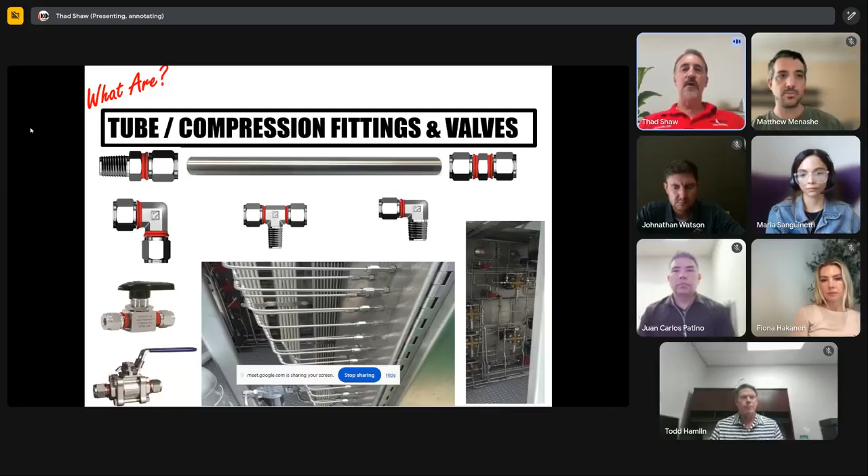One of the big problems with these fittings is they all have the same instructions on putting them in, and during installation, a lot of people do not know the instructions or do not follow the instructions, and that's where we came into play.

We knew there were several things that caused a high leak rate in the industry. Typically when I go do a presentation to an end user, the report is a 5 to 10% leak rate in the industry, and it's because of the installation process.

It's not the fitting itself. The fitting itself, if it's installed properly, is going to work 100% of the time. So we addressed that, wanted to solve that problem: how can we take that 5 to 10% and bring it to zero?

So Superlok came out with some innovation that we call almost dummy proof. It's a leak-free guaranteed process where when you put this fitting in, we're going to guarantee it for life that it will never leak. As you see here, the installation process - I've had a tube fitting in front of me.

You insert a piece of tubing into the fitting and you hand tighten the nut. And once you hand tighten the nut onto that piece of pipe, you mark the nut and the body with a marker, and it's just 1 1/4 turns from hand tight.

And that's the instruction for every brand out there. So they're all the same dimensionally, and intermixability with all brands for the most part is 100%.

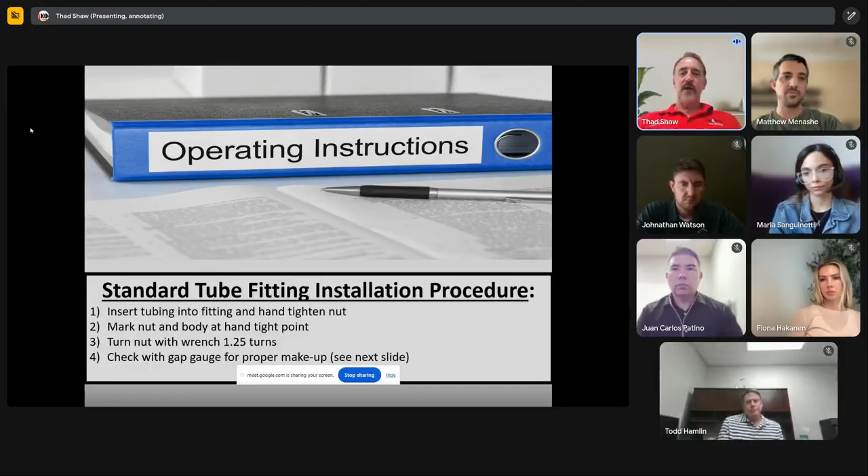It's a gap gauge that you check the gap between the nut and the body after you're done. This is the part of the process that is rarely seen. If I had to give a number on it, less than 5% of installers actually use a gap gauge, and many of them don't know that one exists.

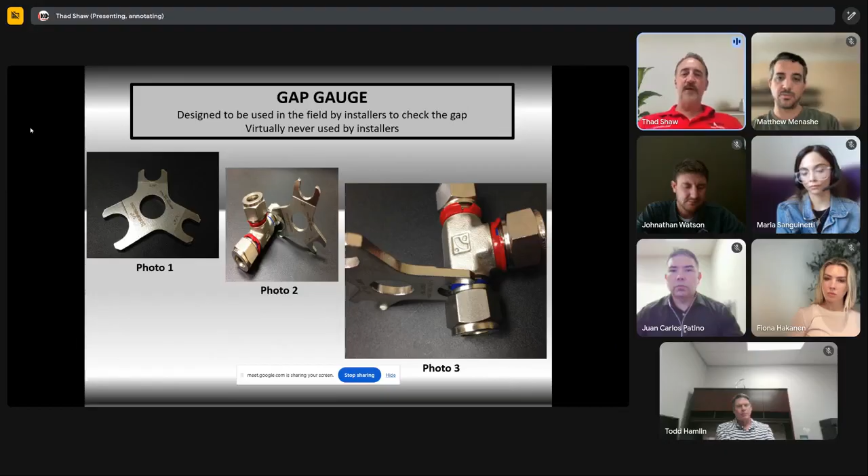So what can happen for you guys in the car wash industry when you do have fittings that leak? One, you've wasted the fitting and the tubing, which is an expense. Number two, a lot of times you'll have to cut that section out and go back and restart.

So we've got some time being spent. Time is money in your industry. And also probably much larger is equipment failure and leaks. In the car wash industry, being down an hour, 2 hours, 4 hours, that actually translates to dollars.

So we want to stop the downtime, and we want to make sure that when these products go in, there is no downtime. We hear a lot from other car wash operators who have used different types of plumbing and piping that while ours may be marginally more expensive, in the long run it costs them much less to use something solid that will never leak, versus having to send maintenance out or having their car wash be down.

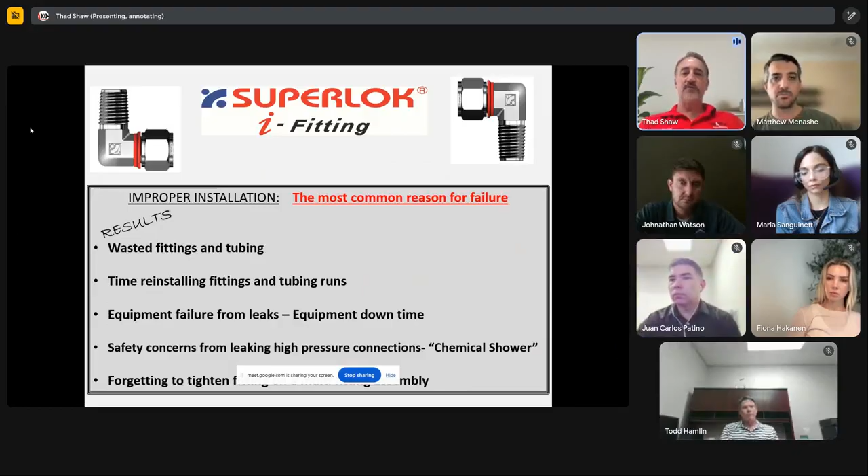So here's our solution, and we call this a game changer in the industry. The Superlok i-Fitting has 2 patents on it, and this is the primary patent. What I'm going to do is share a video with you about an installation, and you'll see exactly how the fitting works.

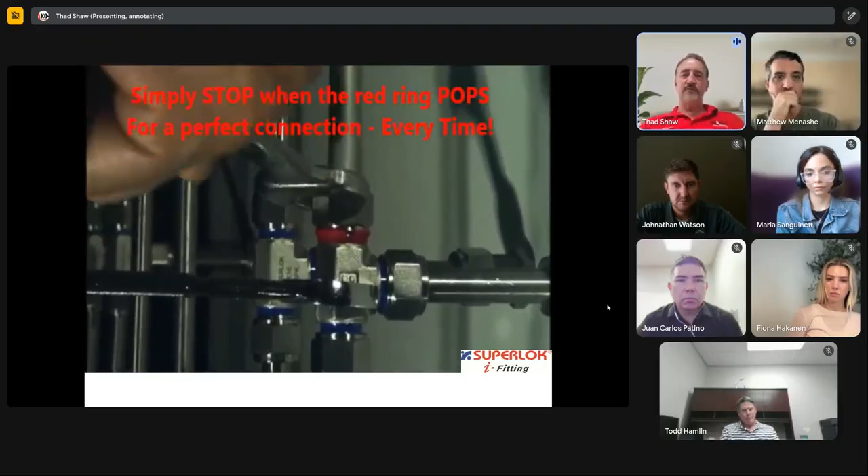See, he's hand tightening that nut onto the tubing. As he turns, that nut will be turned 1 1/4 times. This red ring is an indicator of when that nut has been turned the 1 1/4 times. That exact moment was when the indicator popped. It's a real easy way to quickly put a fitting together and know you've done it exactly correct every time. If that nut was a 1/2 turn back from there, it's too loose. A 1/2 turn or a 1/4 turn tighter than that, it's too tight. So literally that spot where the red ring pops is the exact point of perfect compression, and we guarantee that fitting will never leak.

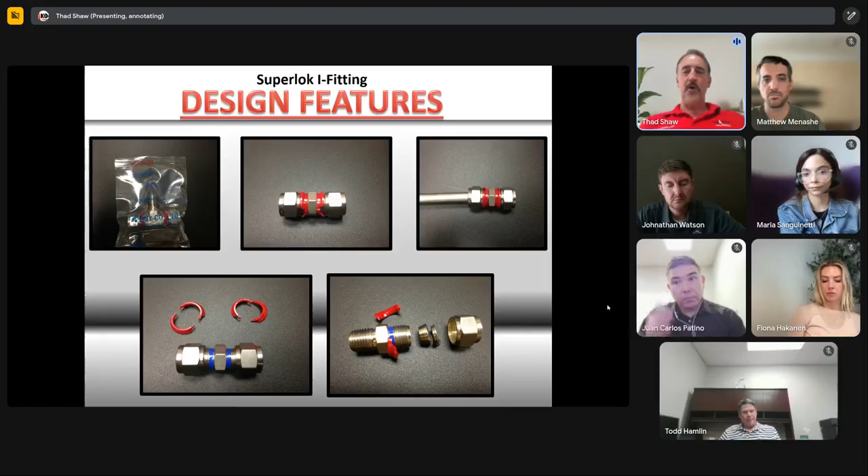So when ours has been tightened, you'll see the blue band appear when it's been tightened correctly. If you want to do a safety check, you can go to that wall and look at the entire assembly. If you still see red rings, you can immediately identify that it has not been tightened yet, which could be a safety issue, so make sure it gets tightened before you leave that facility and there are no leaks. If you see blue bands throughout your assembly, that's a secondary visual confirmation that everything has been tightened, leak-free, and you're ready to go. So those are the two patents that have been the solution in the market to most of the problems that tube fittings have had.

Okay, we're going to move right along. This is some of our return policy. Like I mentioned, we have a lifetime warranty on those products. Our certifications, we have virtually every certification known in the market, including nuclear certification and approvals by some of the largest companies in the world. So if you need certifications, we can certainly provide those for you.

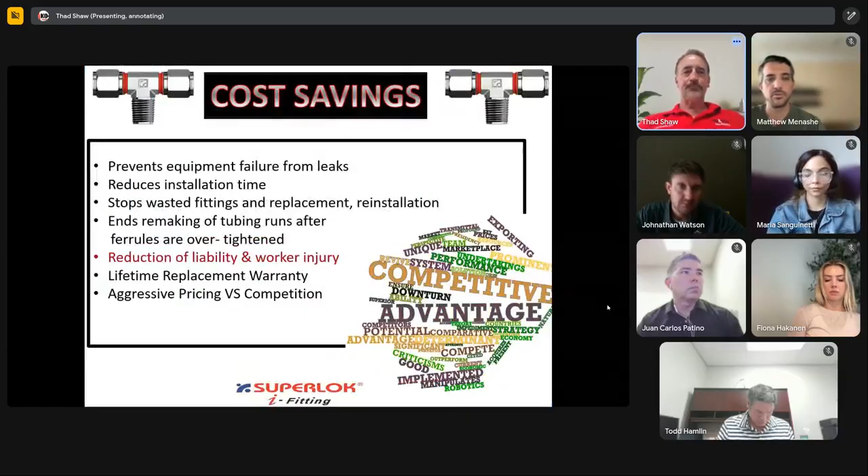A lot of the frequently asked questions we get is what's the pressure rating on a tube fitting. Most of the car wash industry is well under our pressure rating, and the pressure rating is decided by the tubing, not the fitting. The fittings themselves would probably handle 30 to 40,000 psi, and the tubing, depending on the wall thickness you buy, might be in the 2 to 3 to 4,000 psi range. So it's up to the customer to choose the tubing that meets his pressure requirements.

We talk about reusing red rings, and we'll go back to number 4, single or double ferrule. I recommend double ferrule, it's a better sealing system. It uses a little less torque, except in a high vibration environment, and then I would go with single. But we typically recommend double ferrule.

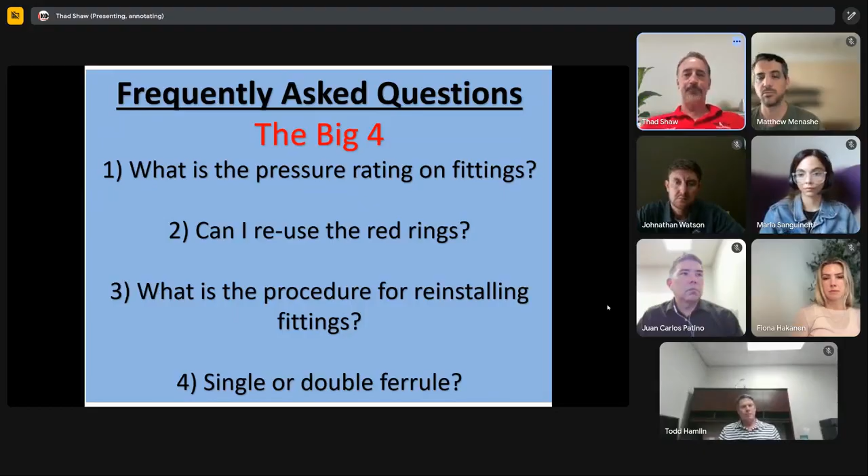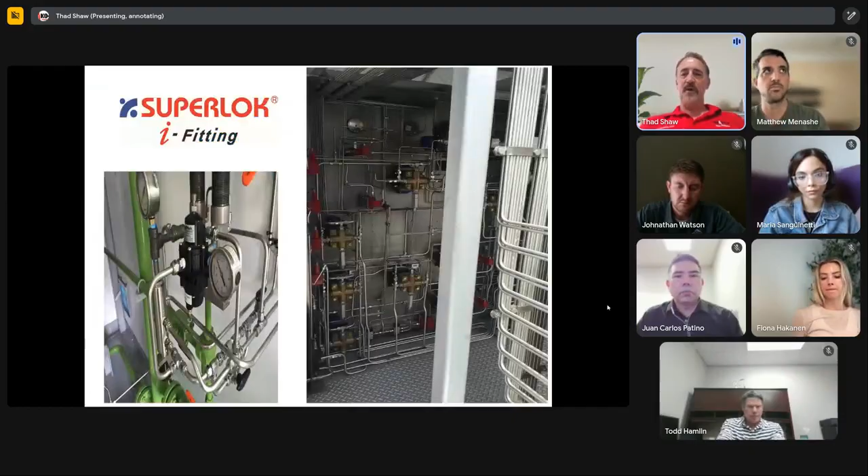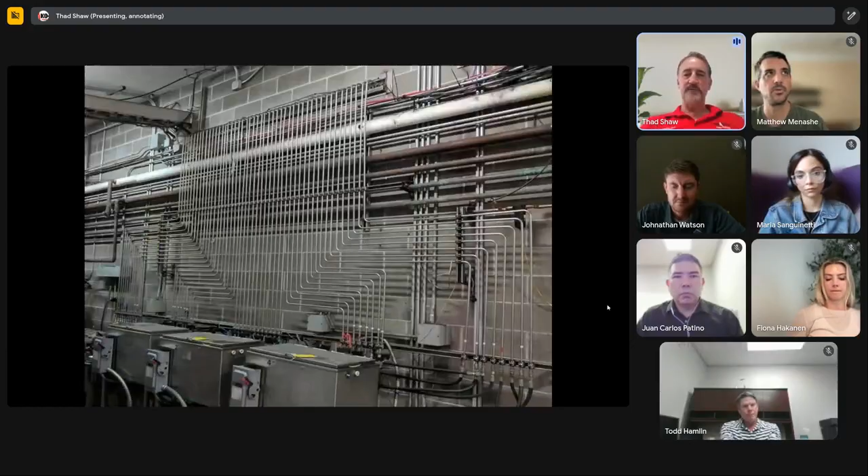But when stainless steel is being used in place of say some kind of rubber or poly hose, you're looking at a lifetime product versus a product that can wear out.

We also carry our main, our company name is Mako Products. Mako Products does have some commodity products such as stainless steel tubing, commodity valves, needle valves, some things used in the car wash industry. And then of course the instrumentation side with tube fittings, MPT fittings, and JIC fittings would all come from Superlok. So Mako Products is the parent company, and Superlok is our premium brand.

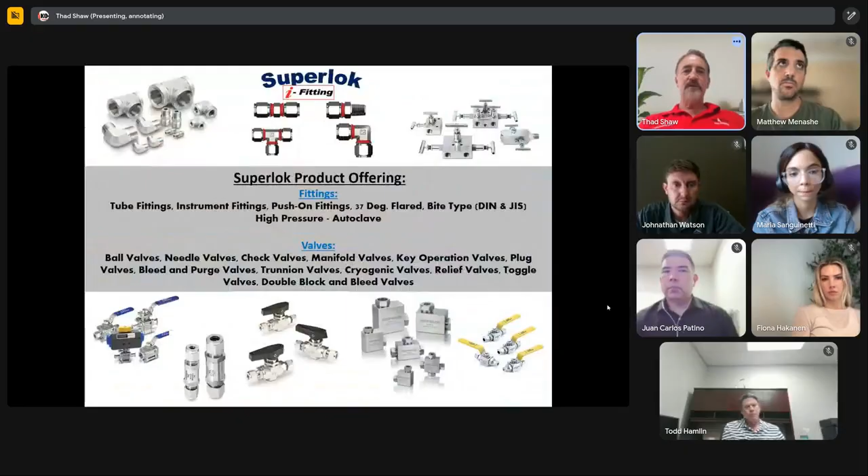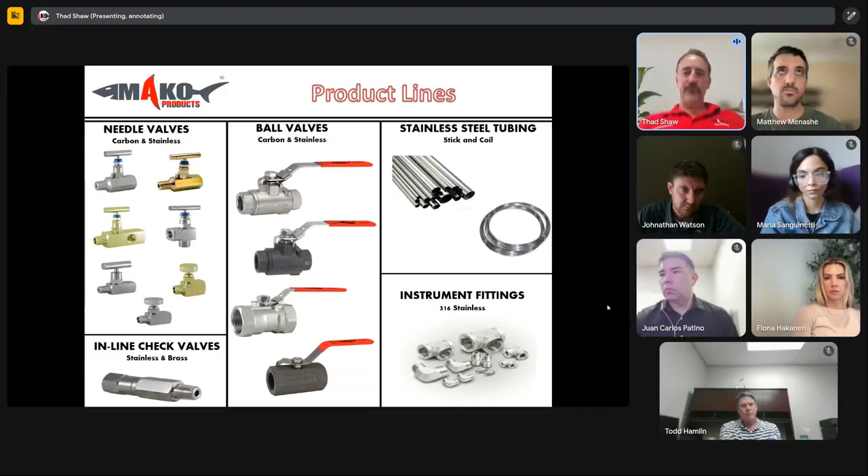And just a few other product lines that we have. A lot of these will not be used in car wash, but this is the Mako Products lineup of commodity products. So basic ball valves, of course tubing, and some instrument fittings.

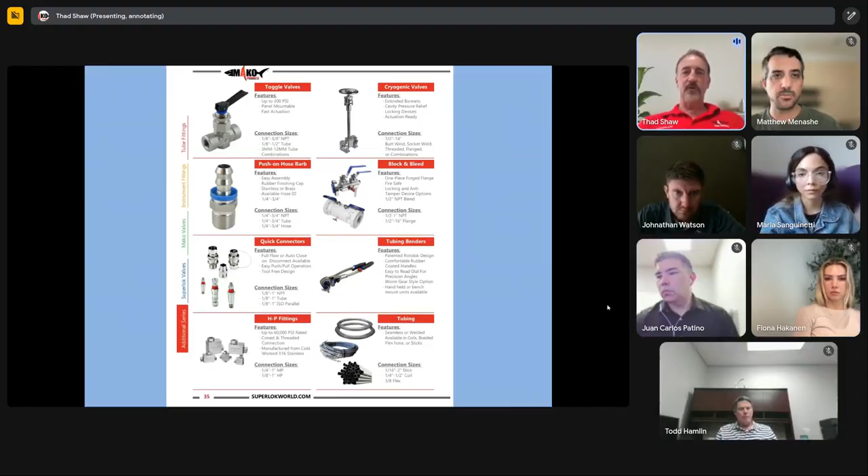And this is just more of our portfolio of products that we provide, whether it's cryogenics, the tube benders, which a lot of the car wash companies need a supplier for. And as you see in the bottom left, the clamps. So with tubing, it needs to be clamped down in place, and we do provide all the different varieties of clamps that are needed in the industry.

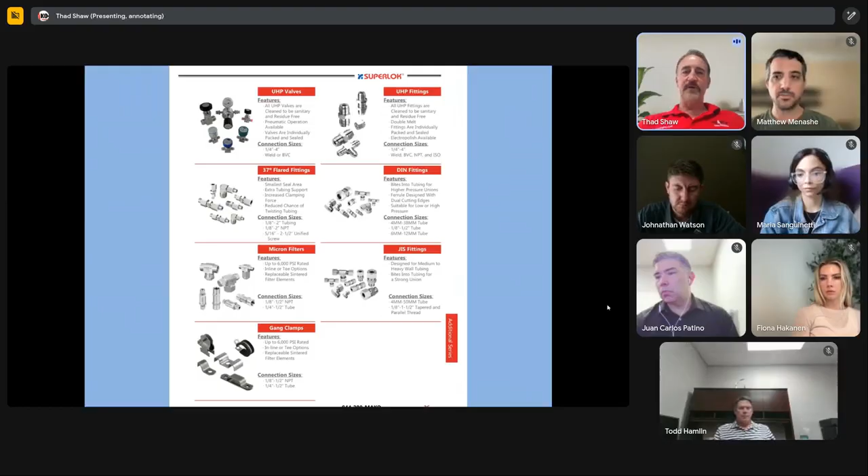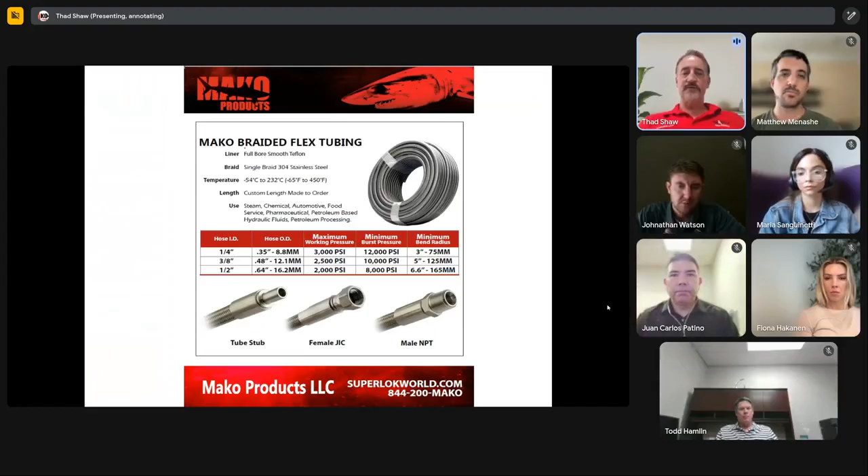Some of the car washes now are requiring braided hose in certain areas, so we do custom braided hose. And our claim to fame is that we will take a custom order and build it and ship it within 24 hours. So that's something that a lot of the car washes have found necessary to get their systems up and running on time.